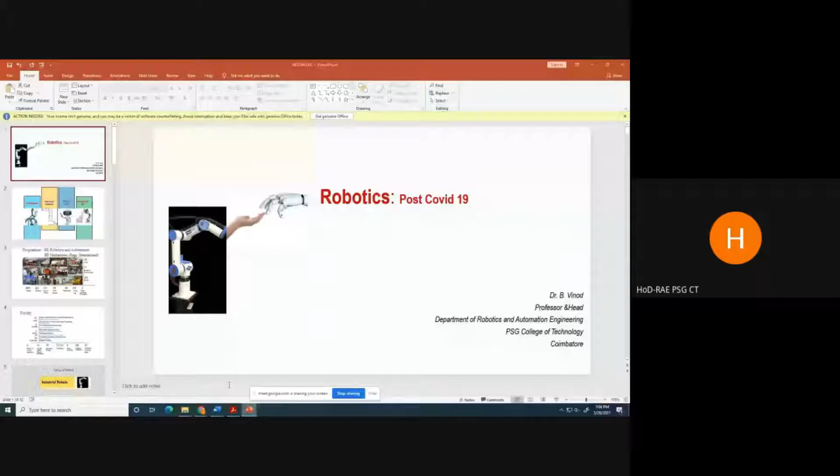I should thank Dr. Jisha, Chair IEEE RAS Kerala chapter, for inviting me for this Robotics and Automation Leaders Symposium, an online webinar series. I understand from her that at least one program is conducted every month, where people from industry, academia, and research are invited to share their experience, knowledge, and suggestions, as well as find opportunities with youngsters, especially students and faculty members, on how effectively this RAS chapter can deliver solutions to the society. So I congratulate IEEE RAS Kerala chapter for organizing such wonderful programs.

There are other programs as well, like storytelling and experience sharing by entrepreneurs. Very interesting programs—very happy to see a lot of things happening in IEEE RAS Kerala chapter. I'm heading the Madras chapter, so we also have webinars. We invite people from industry, academia, and research to share their experience, sometimes hackathons, networking sessions, opportunities for internships—especially now it's all online, so online internships and training programs. So these things are happening here too.

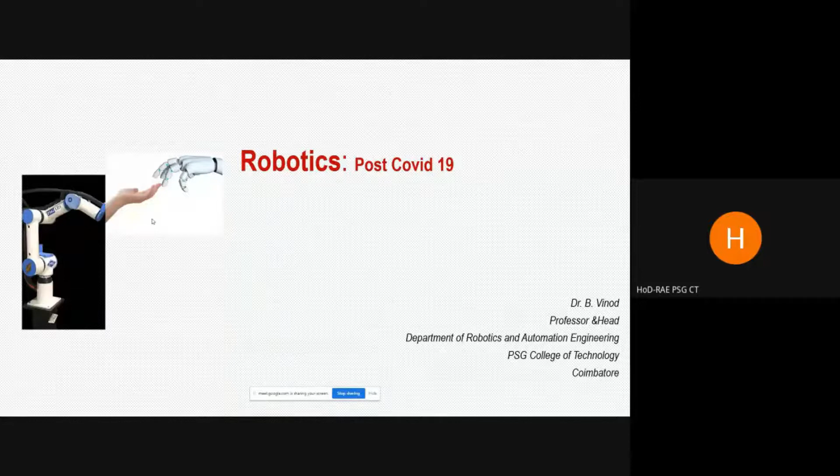I'll tell you how I'll take this presentation forward. I'll give you some introduction about the institution and the programs we have, then a glance at industrial robots and medical robots. Why medical robots has been chosen? You know we are passing through a very tough time in history, so what robots can do, especially in the field of medicine or healthcare. We will summarize with a brainstorming session on what we can do together, and if you have questions, I'll be happy to answer them.

This program of BE Robotics was started in 2011. In fact, I think we were the second institution in the country to offer an undergraduate program. Then we later started an international program also, called BE Mechatronics Engineering, where students study 3 years in PSG and 1 year in Germany. And another program where students study 2 years in PSG and 2 years in Australia.

That is the international program, and the BE Robotics and Automation is certified by Anna University, Tamil Nadu. So far, including this year's passing out batch, around 341 students have graduated from this program, and campus placement is normally around 86 to 90%. That is the normal placement.

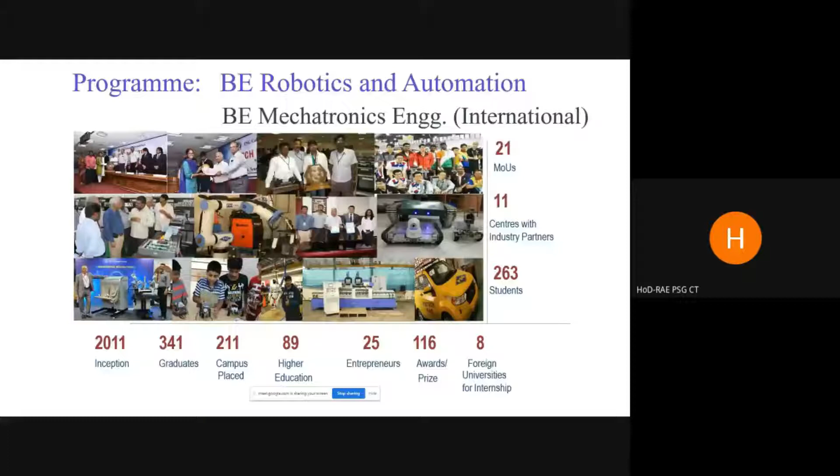And right now around 250 plus students. So that is about the department, and our faculty strength totally is 15 faculty members, 9 are doctorates, 5 pursuing their PhD. The department, apart from the undergraduate program, is also a research recognized department.

So there are 19 PhD scholars. They work in various fields like design, manufacturing and industrial engineering, sensors, machine vision, then controllers and soft computing, machines, drives and controls, automation of welding systems, AMRs, and healthcare robotics. So these are the major areas where the research concentration is.

6 of the faculty members are drawn from industry. 14 years is the average experience of the teaching faculty members. In the last 10 years, 18 sponsored projects have been carried out for various organizations, totaling to a tune of 37.5 crore. We do have 6 project engineers in the department, around 250 publications, and we organize some workshops and conferences.

So that's about the department and my background. Apart from that, the academics, we do have academics and research. I showed you the PhDs as well as the funded projects. Apart from that, in our department we do have a product development group where we focus on developing products for some of the issues we face in day-to-day life. So I'll show you some pictures of that at the end.

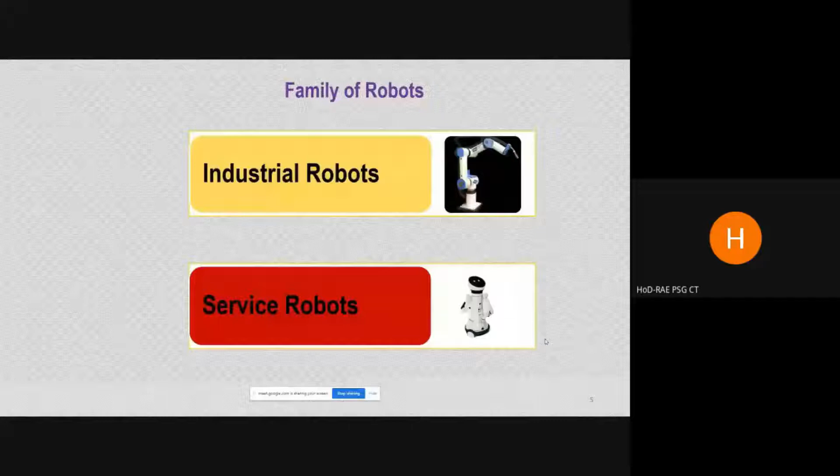And coming to the market, this is what you can get from the internet, like how the market has been growing. You can see the pre-COVID and post-COVID trends, hoping that COVID will end by 2021 at least, or 2022. So there will be a jump expected. In 2019, about 48.7 billion US dollars worth was the expectation.

But I think it was very close. It was 46 or 47 billion US dollars was the market. Then it is predicted that by 2024 we will have 75.6 billion. That is going to be the expected market, considering the need for robots in the post-COVID scenario.

As you all know, in a shop floor people work, so there are too many people. If there are future chances of similar pandemic or corona kind of epidemics that may transfer through air or some medium, it will be very unhealthy for people to work with so many people around. Some industries are now thinking of reducing the number of manpower, making the process more and more automated, so more and more robots for various applications. Considering that effect, I think these numbers are going to still go up. So there is a huge demand for industrial robots in the post-COVID scenario, hoping that COVID will end.

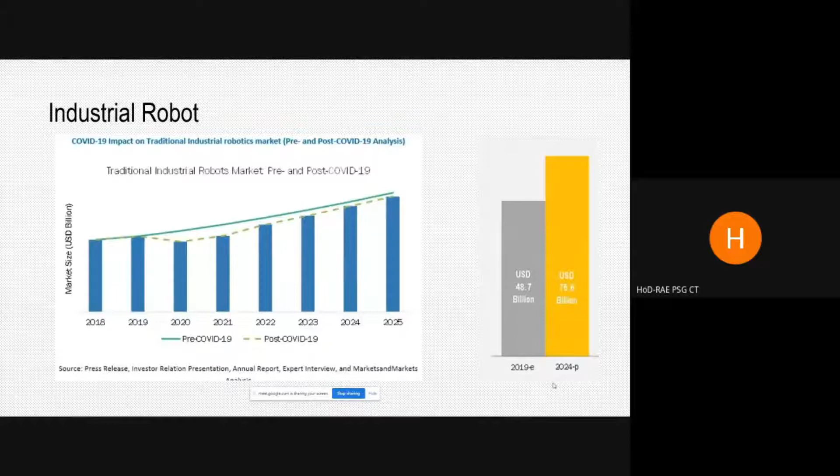And over the past, you may be knowing the Unimate robots, the first kind of robots used for a manufacturing shop floor, where these robots were supposed to handle picture tubes for TV manufacturing. From there, the robotic industry has come through a big change, especially in terms of industrial robots. But this 50 or 60 years of change has brought in a kind of saturation in terms of its structure, its kinematics and dynamics, and whether it's a serial or a parallel kind of combination.

So the major configurations you can see here: Cartesian, SCARA, articulated, cylindrical, delta. Delta is a parallel robot. Then polar robots and collaborative robots, or cobots. This is the new generation robot which is made to work along with humans.

Other robots, if you have seen any industry or industrial videos, you would have noticed that these robots will be kept inside maybe a cage, isolated from humans, because when humans go close to these robots, there is a chance that it may hit or humans may get hurt. So that leads to big issues.

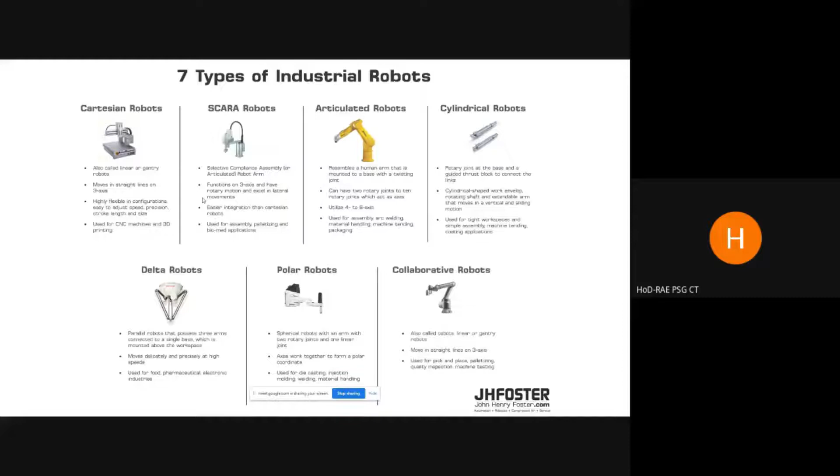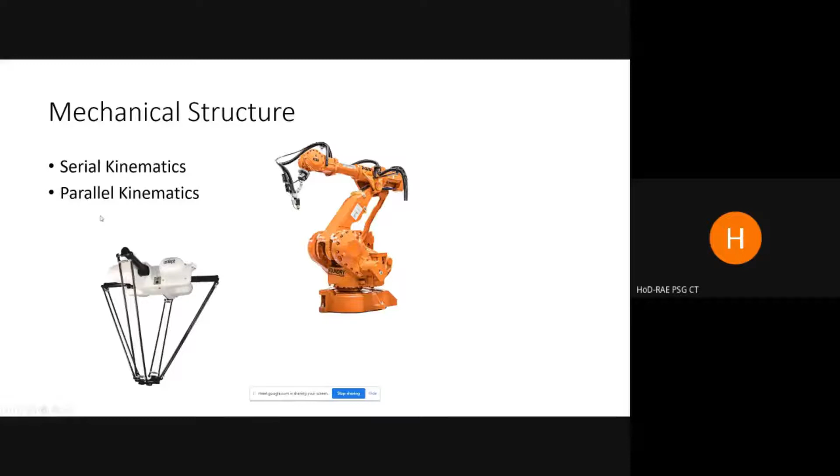So according to the structure, there are two specific ones. One is where the power is transferred serially, so there are joints J1, 2, 5, 6, or 7. Then we have parallel kinematics, where instead of serial power transmission, it's parallelly transmitted.

And if you see the industrial robot market, what kind of robots we get in India, mostly it is I would say 90-95% of the robots consumed by Indian industries. In 2019, close to 3,900 robots were sold in India, and 90% of those robots were imported, maybe from Yaskawa, KUKA, Hyundai, ABB, Kawasaki, Universal, Fanuc, Panasonic, Nachi. So there are several brands, but these are the most popular brands sold in India.

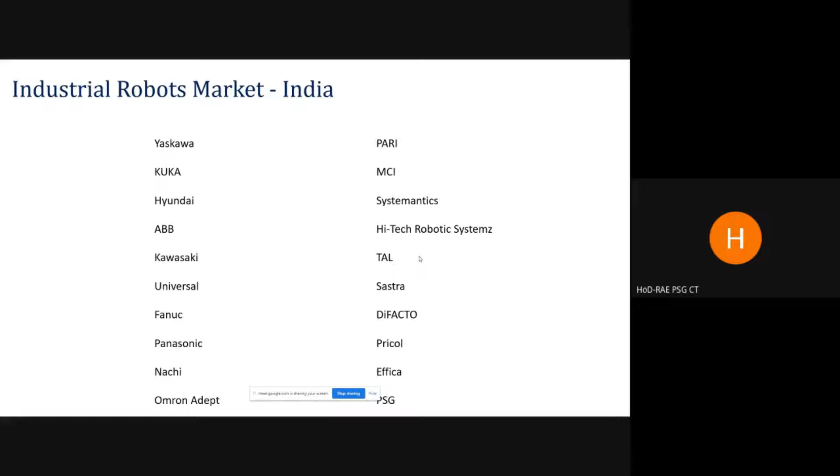You just come out with a beautiful product, then the sky is your limit. You have talent, you have expertise, then nobody can stop you. And now all governments are supporting - there are enough funds for startups. So I think the government of Kerala is also doing a good thing by supporting startups. Robotics is another big area where a lot of good things can be done.

Conventionally, industrial robots are used for applications like material handling, transfer, pick and place, and palletizing. We are currently doing a project for one of the FMCG companies who has a big warehouse in Bangalore, for loading and unloading cartons and gunny bags from a conveyor to the truck. So far they have been using manpower - manually picking these cartons and loading them inside the truck.

But as you know, this pandemic has forced these companies to change, because most of these trucks are fully covered, and it will be tough for more than 2 or 3 people to go inside since chances of spreading COVID are very high. So that has to be avoided. The thought of how to avoid this led to a robotic solution - an AMR with a robot on top that will be able to transfer materials, cartons and gunny bags from conveyors to the fully closed trucks. So the conventional concept of where industrial robots are used is now changing.

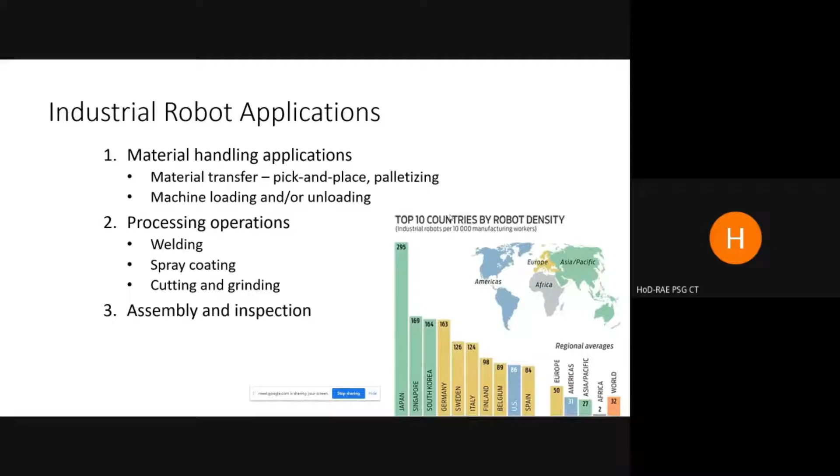So pre-pandemic, it was more about applications in highly developed countries with declining population like Japan, Germany. Or the purpose of robotics was to reduce cost, since human workers were and still are very expensive, so it was cheaper to go for robots.

Post-pandemic, the priority has shifted to workers' safety. This is not just to improve productivity or reduce cost, but safety of the available people on the shop floor. So the number of people on the shop floor has to be reduced, with more and more robots, so that whoever is left on the shop floor will be safe to work.

So can we use robotics to break existing barriers to human creativity? This is one thought process that will go into the industrial robotics sector.

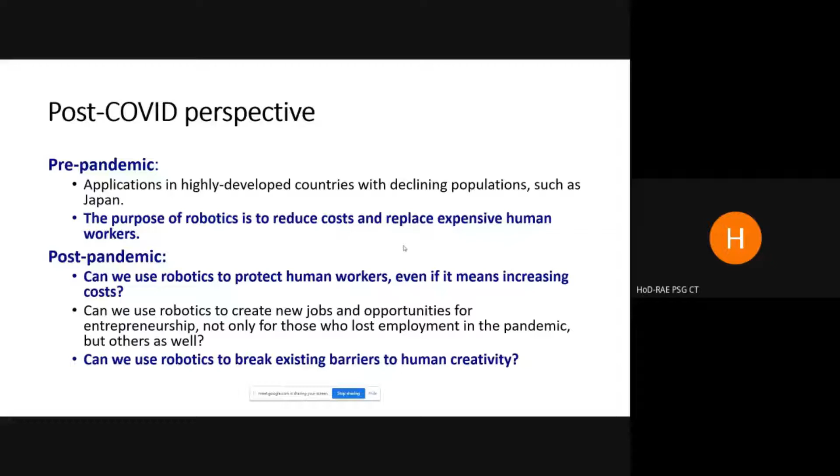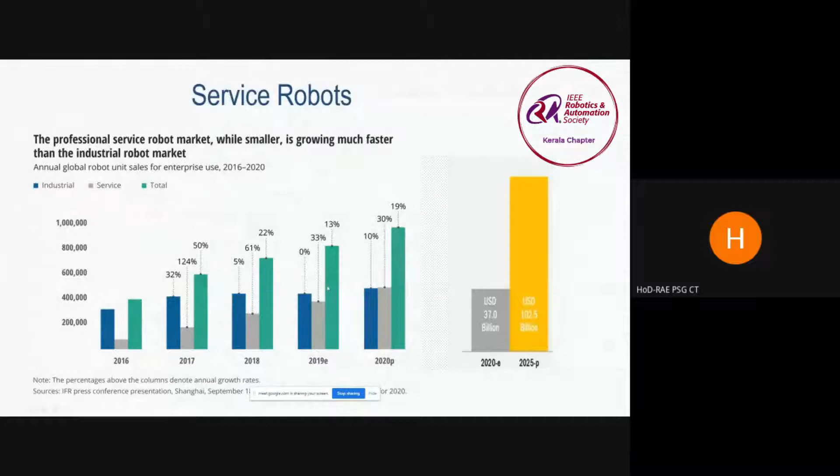Coming to the service robot sector, you can see there is a graph here where the blue bars are industrial robots, gray bars show service robotics, and green the total. So from 2016 to 2020, though there is steady growth in industrial robotics, service robotics is expanding or selling much more because it's a big segment covering many areas. By 2020, service robotics has almost leveled the industrial robot market, and it is going to outgrow it further.

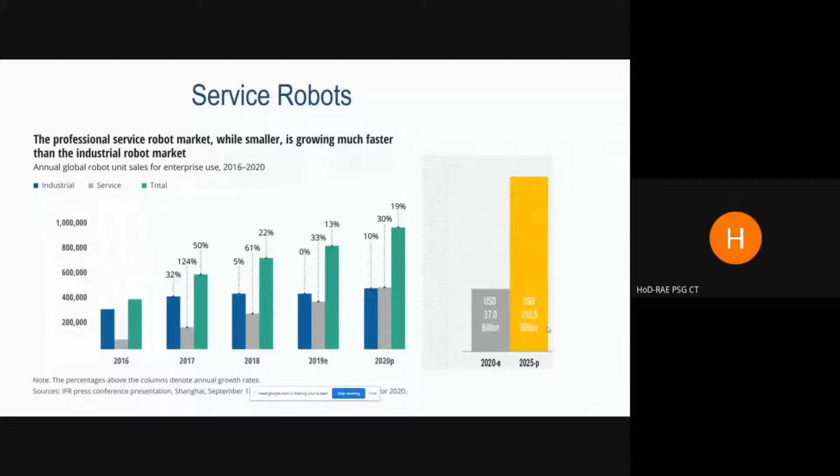By 2025, the service robotics field is expected to be worth $102.5 billion. If you recall, for industrial robots it was somewhere around 74 or 75 billion US dollars. So service robotics is going to see a totally different picture, and with COVID-related restrictions, this number is going to increase even more.

One major component of this service robotics is healthcare robotics. You can see some pictures shown here, and I think you can find out what the applications are. The first one is a surgical robot.

I'm sure a lot of hospitals in Kerala are using robotic surgery. Robotic surgery doesn't mean robots are doing the complete surgery, but it's robot-assisted surgery. If you Google it, you can find da Vinci robots, one of the monopolies in medical or surgical robots. Several hospitals in Cochin use surgical robots. The advantage is that it assists the surgeon, and it's non-invasive surgery, so patients recover much faster than with conventional surgery.

The surgical time is also much less, so on a particular day the team of doctors can do maybe twice the surgeries compared to conventional surgery. And everything is recorded, so there's little chance of things going wrong since it's all tutored and trained, but even if something does go wrong, everything is recorded. You can go back to the history and find out what went wrong, or if you want to revisit the surgery after a year, the entire files may be available.

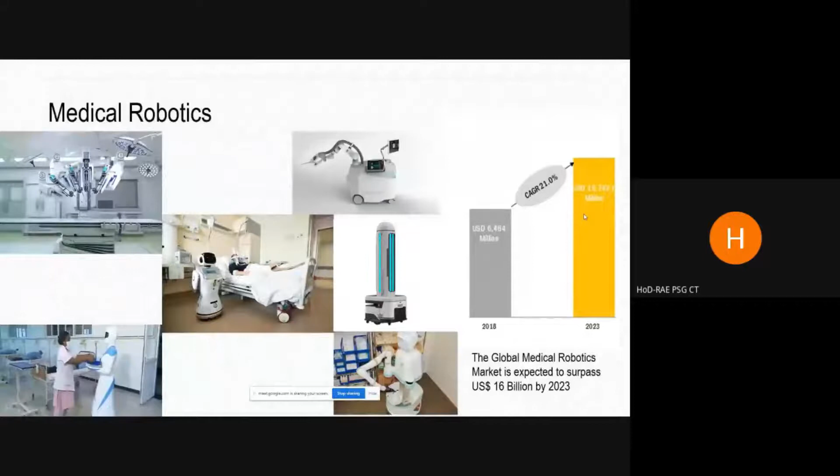So the kind of medical robots - okay, I missed showing you the global medical robotics market. It is expected to grow at a very high rate, about 16,742 million US dollars, that is going to be the market.

Coming to the various segments: surgical robots for laparoscopy, orthopedic, neurosurgical, steerable robotic catheters. For operating all these kinds of surgical robots, the doctors need to be trained, so Endo Trainer is another robot that can be bought by all hospitals for training surgeons. There's also rehabilitation robots, therapeutic and assistive exoskeletons - if you have weakness in standing up and walking, exoskeletons can help you walk or lift weights - robot nurses, diagnostic chatbots, disinfection and pharmacy robots. There are a lot of applications. You can also think about your present day situation, what kind of robots would you like to have. These are all solutions that will emerge and be sold in big numbers.

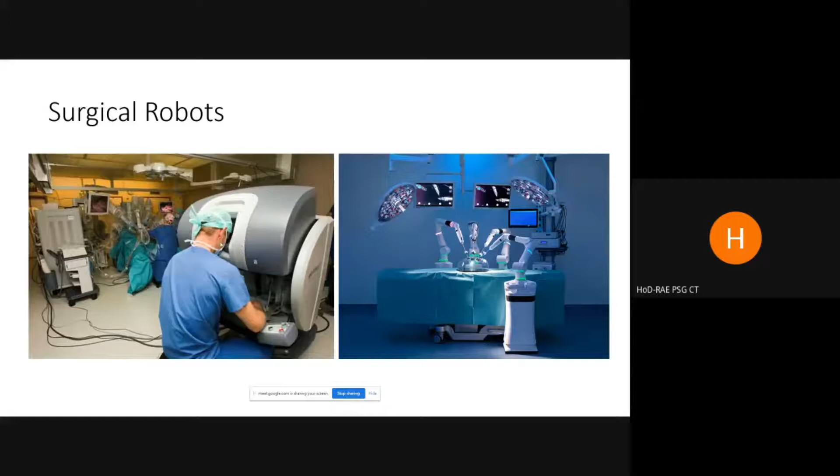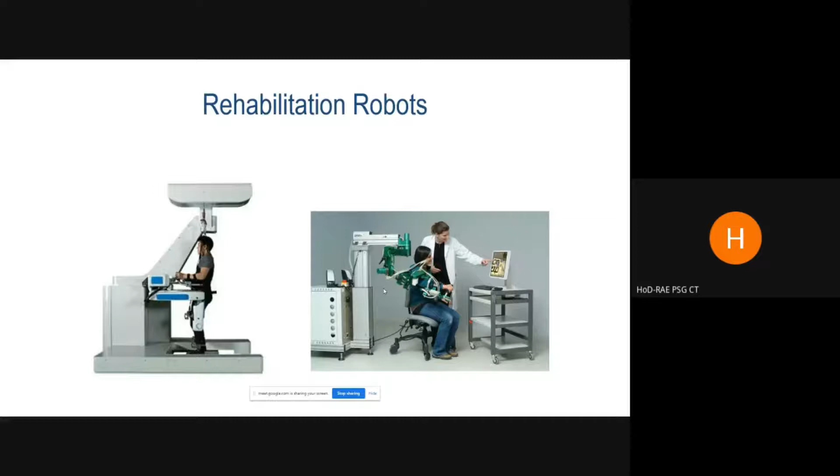Then there are rehabilitation robots. I think in the post-COVID situation, because there are a lot of complications expected because of COVID, surviving is one thing, but surviving after COVID healthy is another thing. So people have problems with muscles, bones, and we may need a lot of physiotherapy treatment. That's another field where we have scarcity of human capital.

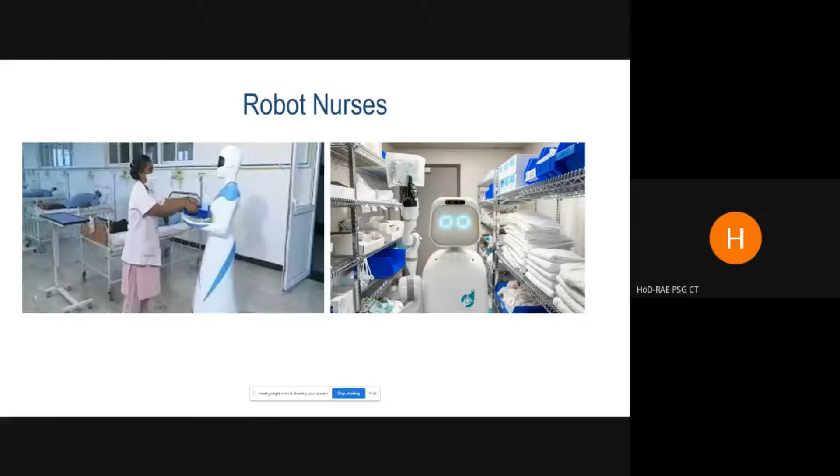So robots for that - I showed you this picture already. Robots, nurses that can deliver materials from places like pharmacy, bedsheets, linen, medicine, and then diagnostic chatbots.

You would have seen a lot of advertisements in newspapers and online, on YouTube and all. Now we are very scared to visit hospitals, not just because of COVID, but if you want to get treated for something else, still we fear to go to a hospital because chances of getting infection through COVID can happen. So what we do is we call a doctor, and the doctor on call.

I think this will change. It's going to be more that a chatbot will be able to get a lot of information from you, and based on some of your data, if you can upload it, that will be able to predict what are the possible reasons for your illness, what kind of treatments or medicine you have to take, and whether further investigations are required or not.

Disinfection is very important, especially when you have manpower scarcity, on the cleaning side, cleaning of the shop floor, the things COVID patients handle. I'm not sure about the medical guarantee of whether UV disinfection can 100% disinfect, but still to an extent UV disinfection is proved to be successful. So autonomous UV disinfectant robots are also getting popular.

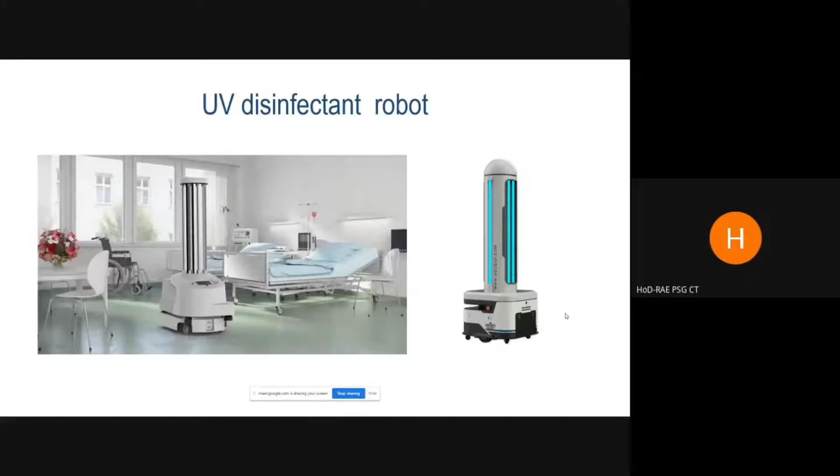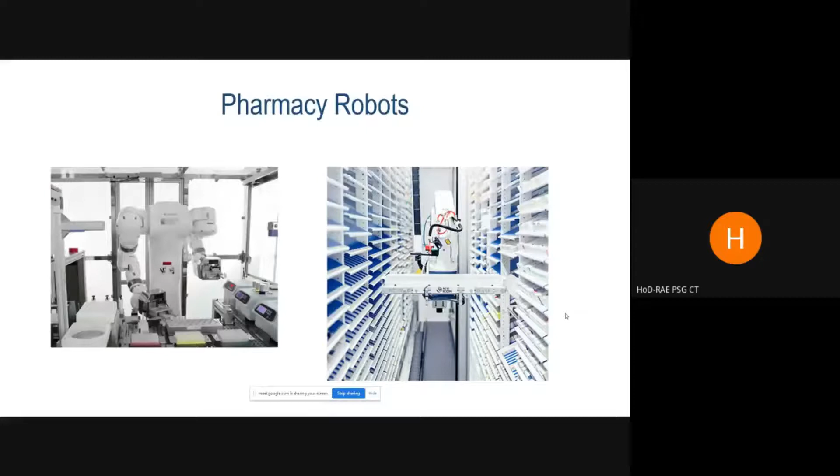There is a company here in Coimbatore from our own robotics group that has started making this kind of robots. And then pharmacy delivery robots, testing robots for manufacturing of tablets - robots are employed. And now swab collection, that's another big thing. Robots are employed for swab collection of COVID patients.

So a lot of transformation is going to happen in healthcare, with more intelligent robotic systems, and we need artificial intelligence for that. One is for keeping us healthy, to maintain our own healthy condition, then for early detection of diseases.

I'm sure you would have heard about genetics, genomics. So if your family members' history, all this data, are fed to an AI-based system, and if your DNA is already there, the systems will be able to tell us what kind of diseases are awaiting for you. Maybe at the age of 40 you may tend to get cancer, or at 45 something else, at 50 diabetic, at 60 high blood pressure. So all these things can be detected or predicted early based on your ancestors. Genetic AI-based healthcare systems are coming up, which can give a lot of indications about what kind of diseases you are going to get and what we can do for that.

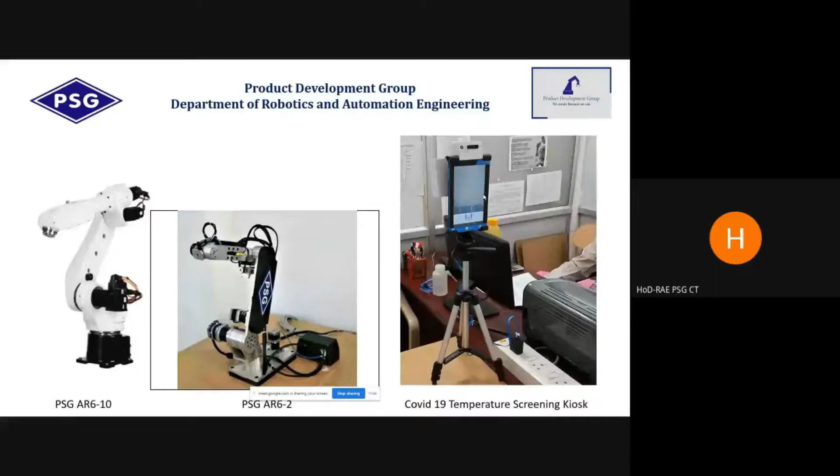Then we have some mobile Bluetooth based platforms, basically for students to learn. And there is a 5+1, or 5 degrees of freedom, 3D printed robot arm which we have started selling to training institutions and colleges. This is more than enough to learn the kinematics and dynamics of programming a robot - you don't have to go for an expensive industrial robot costing 15 or 20 lakhs.

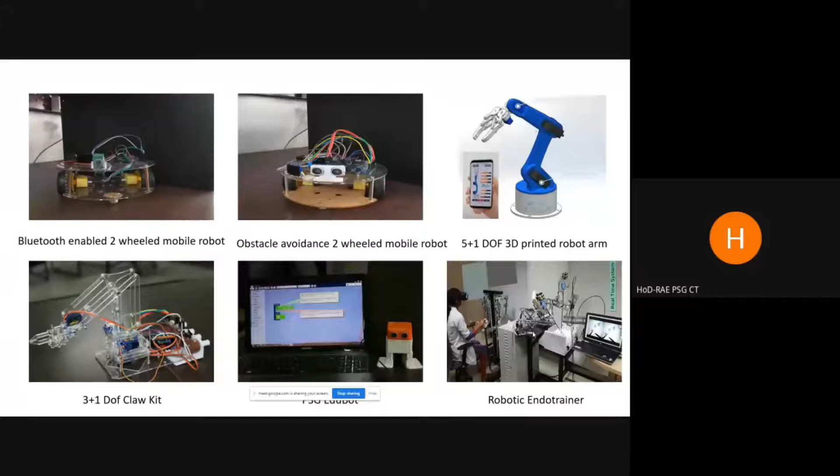And there's a simple one for school children, a claw kit - these are all simple stepper motor based ones. There is another educational robot where you can make the robot dance, but it's all drag and drop kind of programming. And this is the endotrainer, the second version of it, which we have developed.

We have also made 2 drones. This drone has a payload of 300 grams, which can capture images while it flies. And we are in the process of making a 5 kilogram payload drone for pesticide spraying. So these are some of the products we have developed, which will be commercialized and will be coming to the market.

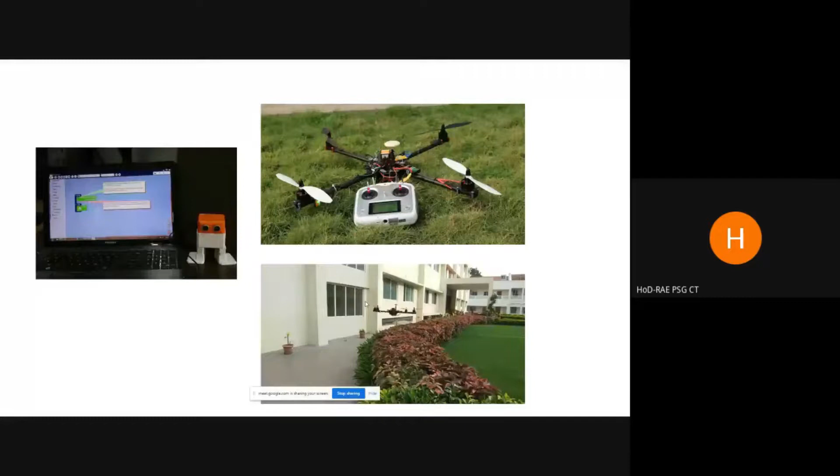That's a short glimpse of the activities, or what is possible in robotics, and I request all of you to think. These are some applications people are currently thinking about, but apart from that, there will be a lot of unique applications you can find from your locality, your neighborhood, maybe your own house, and try to find solutions for that. When you have a research question ready and the problem is there, the solution arrives. The only thing you need to do is brainstorm, network with friends, and find like-minded people who are experts.

Now, as you know, there are a lot of communities globally, so you don't have to limit yourself to your locality. You can have a friend from Russia, Japan, or the US who will be able to assist and help you, or even sometimes get you some components. So there are abundant opportunities, all kinds of possibilities exist. I think it is our passion and our quest, the curiosity to do things. If you have any questions, I'll be happy to answer. Thank you.